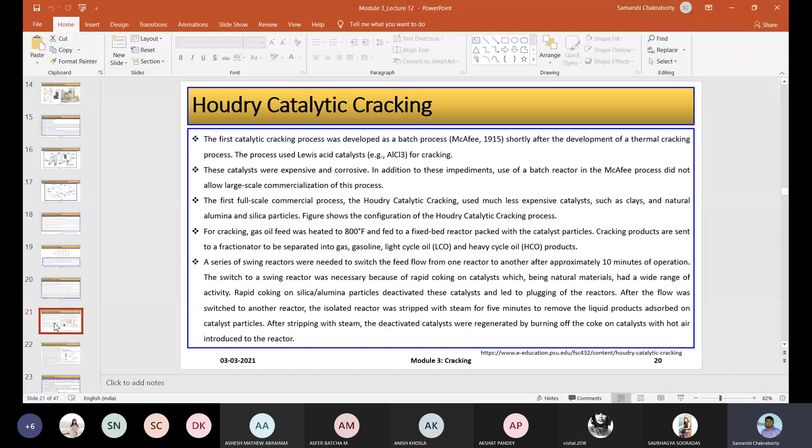So previous day, I guess we had covered up to thermal and catalytic cracking process. Okay, so we'll start today with the thermal cracking process. As the name suggests, cracking is done on the basis of higher temperature. Since we are not using any sort of catalyst, to crack down the heavier petroleum components, the temperature requirement is also significantly on the higher side. So there is a chance of coking, which is why nowadays thermal cracking is not actually preferred in the petroleum industry.

Cracking, by this time you already know, is a petroleum refining process where heavy molecular weight hydrocarbons are broken into smaller hydrocarbons by the application of heat and pressure, with or without catalyst, to derive a variety of fuel products. Cracking is one of the principal ways to convert crude oil into useful products such as motor gasoline, jet fuel, and home heating oil.

The term cracking is used to describe any type of splitting of a molecule under the influence of high temperature, catalyst, and/or in presence of solvent, such as in destructive distillation or pyrolysis, where a higher molecular component is broken down to, here you can see, pentane. Now if it is like C11, what do we call it? Up to C10 we call it decane. So C11, what do we call it? Like pentane, hexane, heptane, octane, nonane, decane, and the C11 component, what do we call it? We have this name, right? I'm not being able to remember the name at this point of time.

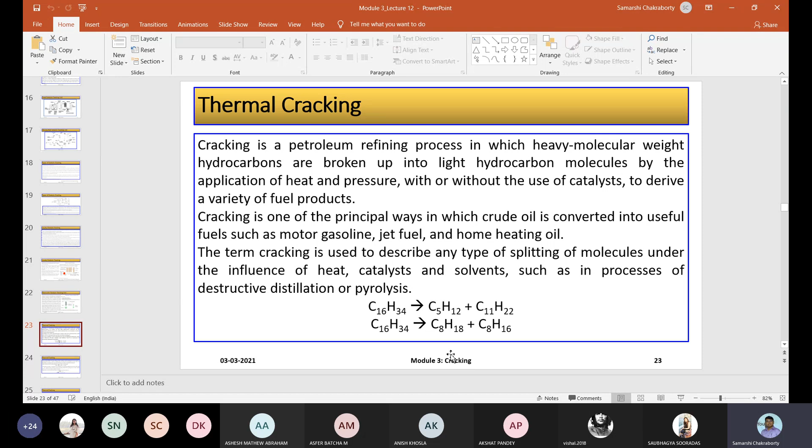The above reaction is most conclusive at moderate temperatures around 400 degrees centigrade, but fragmentation continues with increasing temperature, giving rise to more simple products and occasionally complex products. But if I break my components into octane or octene, this is not going to give any special benefit. So other than breaking it, let's say from C16, if I break it to octane and octene, but if I want to produce more valuable products, I need to lower down my carbon numbers, or to have shorter chain hydrocarbons, we need to increase the temperature even higher. But if I do that, there is a chance of further breakage. So the above reaction is most conclusive at moderate temperature around 400 degrees centigrade, but fragmentation continues with increasing temperature, giving rise to more simple products and occasionally complex compounds.

A paraffin of lesser molecular order cracking can be illustrated as, for example, C12 getting broken down into C6 and C6, and C6 you can further break down into C4 or C3.

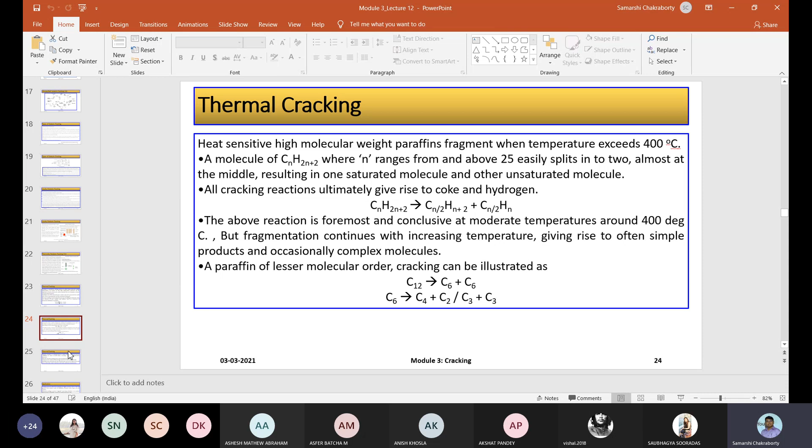By a combination of all these things, you can produce either C4 based products, or C3 plus C2 products, if you heat it up to an appropriate temperature. But for thermal cracking process, since we are not using any type of catalyst, the temperature is a little bit on the higher side.

Thermal cracking in a refinery process heats up your product to 800 degrees centigrade, at a pressure of approximately 700 kPa. Normal atmosphere is 101 kPa, so 700 kPa is a little on the higher side. This is used to break down, rearrange, and combine your hydrocarbon molecules.

Thermal cracking process was first developed in 1913. However, this process produced a lot of solid or unwanted coke.

Distillate fuel and heavy oils were heated under pressure in large drums until they cracked into smaller, more valuable, more useful hydrocarbons with better anti-knock properties. So whenever we do a cracking operation, we are always talking about this knocking tendency.

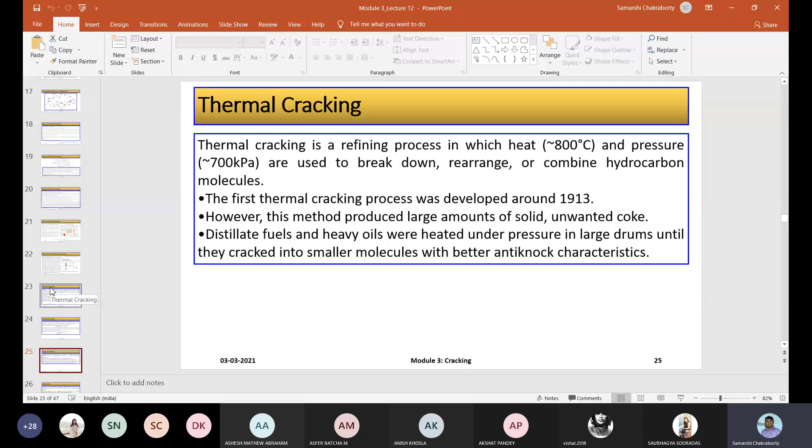Today I don't know whether I'll be able to entirely complete this part. We have to also talk about steam cracking, so in the next class we'll talk about octane number, cetane number, and those properties of gasoline. Cetane number is actually for diesel, and octane number represents how good your gasoline is. Let me just go further.

The cracking process allows the production of lighter products such as LPG, gasoline, from heavier crude oil distillation fractions such as gas oil as well as residues. Thermal cracking is used to upgrade very heavy fractions, or to produce light fraction distillates, burner oils, or petroleum coke. As a product of this, petroleum coke is also produced.

Two extremes of thermal cracking: high temperature process, between 750 to 900 degrees centigrade or even more. Since you are going up to that level, it produces ethylene and other feedstock for the petrochemical industry.

But as I've already told you, in this type of cracking, whether catalytic or thermal, we do not have too much control over exactly what products we are going to produce. We may have an idea that we might produce C2 range or C3 range, but that is not always certain. It is also not certain how much saturated hydrocarbons we are going to produce, and how much unsaturated hydrocarbons we are going to produce, so you cannot be pretty much sure.

So for thermal cracking, catalytic cracking, and steam cracking - these three types - you are not sure whether you are only going to be able to produce saturated hydrocarbon. Obviously unsaturated hydrocarbon production is also possible.

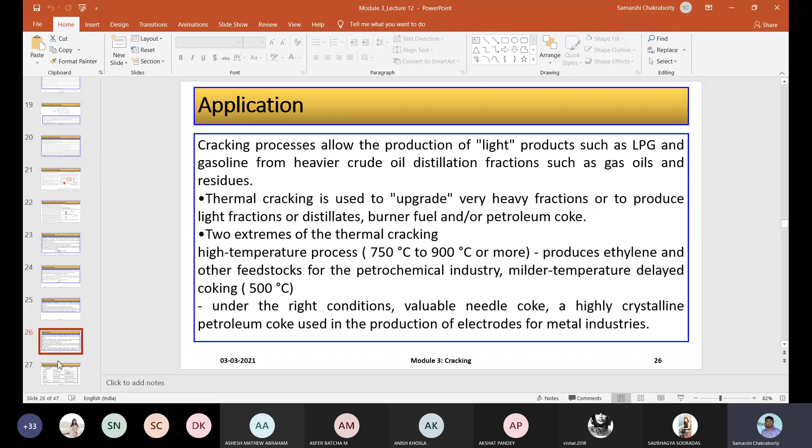So the second stage is, this is one extreme. You see here, by increasing the cracking temperature - these are different types of thermal cracking operations - depending on your cracking temperature, you can produce different types of product: whether hydrogen, gas, gasoline, or unsaturated compounds. That is determined by what cracking temperature you are running your operation at.

At between 425 to 460 degrees centigrade, we are only concerned about lowering down the viscosity of your fuel oil.

You break it down into smaller hydrocarbons so that the viscosity of your fuel oil goes down. Then between 460 to 520 degrees centigrade, you start thermal cracking, where you can produce gas like LPG, gasoline, tar oils, and circulating oils.

Beyond 520 to 600 degrees centigrade, you start to form more and more coke. This is low temperature coking, where you produce gas like LPG, gasoline, plus soft coke.

Beyond 600 to 800 degrees centigrade, you are not going to be able to produce any more gasoline, so gasoline production is out of question. Now you will only be able to produce gaseous products, maybe a little bit of LPG, and mostly unsaturated compounds like ethylene, propylene, and butylene.

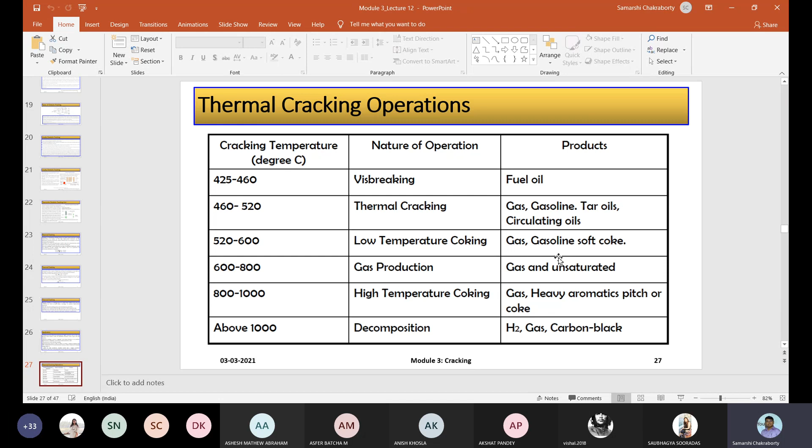This table is very important. It talks about the dependency of your cracking temperature on the nature of operation, plus your cracking temperature also determines what type of products you are going to produce from your cracking unit.

Catalytic cracking yields a higher quantity of branch chain unsaturates and aromatic hydrocarbons compared to thermal cracking. In thermal cracking, you have more chances of coke formation. Catalytic cracking is a better controlled process than thermal cracking. This is true because the reaction time in catalytic cracking is very small, so chances of coke deposition are less. It's a much better controlled operation, so proper circulation of your catalyst, feed, and product goes in a much more systematic way, so its performance is much better.

Then comes petrol production. Petrol obtained by catalytic cracking has lesser sulfur. If you are producing gasoline, petrol is nothing but gasoline, just another name for it. By thermal cracking there is a chance that your feed may contain some amount of sulfurous component, but using catalytic cracking that chance is very less.

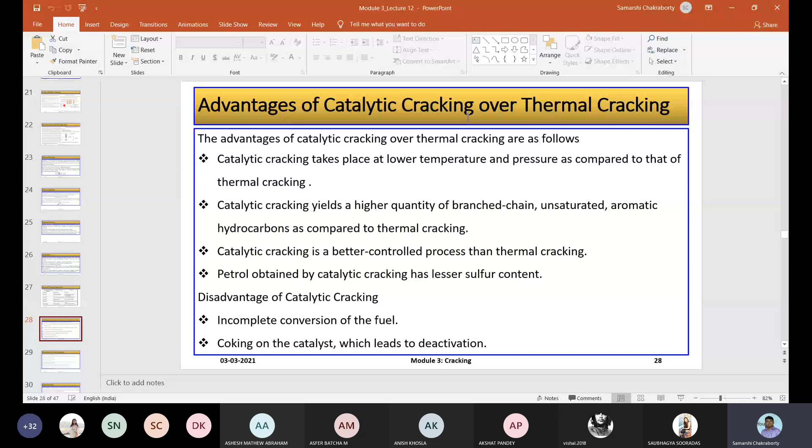One of the disadvantages of catalytic cracking is incomplete conversion of your fuel, and coking on the catalyst leads to deactivation. Since your reaction time is so small, you cannot expect complete conversion of your feedstock because the residence time within the reactor is very small, and from time to time you have to regenerate your catalyst since coke deposition causes catalyst activity to go down. So these are the advantages and disadvantages of catalytic cracking over thermal cracking.

What are the properties of your crack product? Boiling point, pour point, viscosity obviously go down in your crack product. Sulfur in the crack product increases if you are dealing with heavier fractions, although much of it escapes in the form of hydrogen sulfide, because during catalytic cracking you are breaking down heavier petroleum fractions.

During this process there is a chance that you also produce some amount of hydrogen. So hydrogen will actually react with your sulfur and form hydrogen sulfide, and it can escape.

Other than that, the characterization factor, which I talked about in the first module, actually decreases. We talked about how by looking into the characterization factor we can determine whether my crude is aromatic, paraffinic or naphthenic. So in terms of this, your characterization factor actually decreases. For the refinery operation, the octane number increases since obviously you are producing lower molecular weight hydrocarbons.

Additives like tetraethyl lead or tetramethyl lead are extensively used to blend with gasoline to boost its octane number. But the problem is lead poisoning, so now this TEL, tetraethyl lead, or tetramethyl lead are no longer used. Now they have moved on to methyl tertiary butyl ether or ethyl tertiary butyl ether. These are some of the octane boosters that industry generally uses.

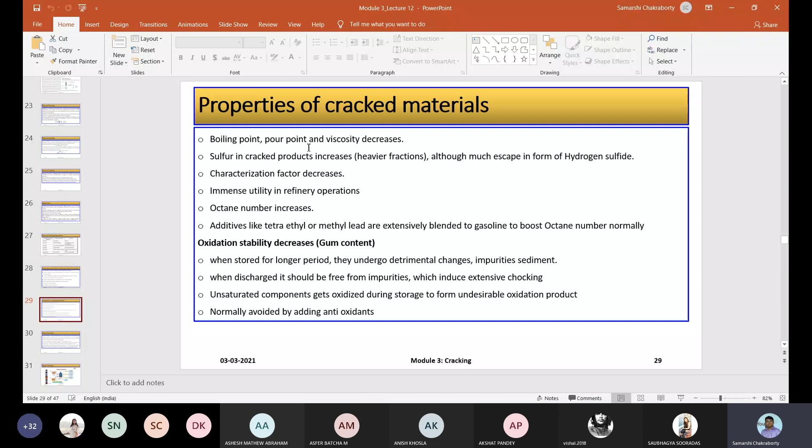Now the second part is very important. This is important not only from your petroleum refinery viewpoint, but also in the context of the petrochemical industry, since this steam cracking process is the process which produces a large amount of unsaturated products, which is the base feedstock for your petrochemical industries like ethylene, propylene, butylene. So steam cracking is a petrochemical process in which saturated hydrocarbons are broken down into smaller, often unsaturated, hydrocarbons.

It is the principal industrial method for producing lighter alkenes. Alkenes are unsaturated, commonly known as olefins, including ethene, ethylene, propylene. It can produce ethylene and propylene, the most important chemical feedstocks, but due to their relatively high reactivity, unsaturated components tend to react with each other, so chances of gum formation are also there. And obviously the chances of polymerization are much easier due to their relatively high reactivity.

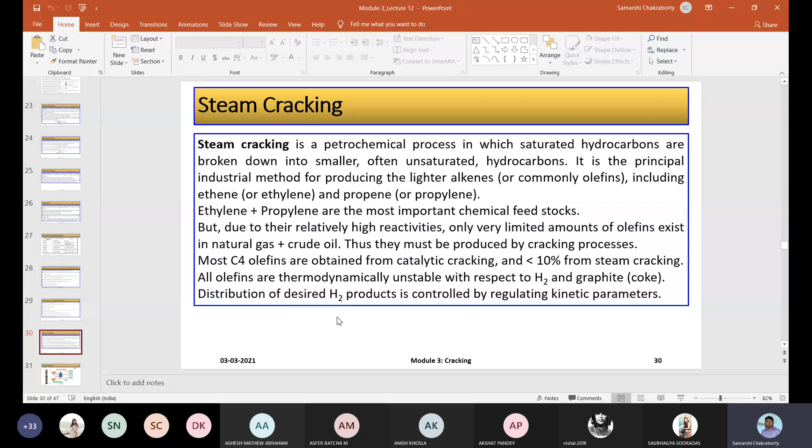Only a very limited amount of olefins exist in natural gases and crude oil. Thus they must be produced by a cracking process like steam cracking. Most C4 olefins are obtained from catalytic cracking, and less than 10% from steam cracking. All olefins are thermodynamically unstable with respect to H2 and with respect to H2 and graphite. The distribution of the desired product is controlled by regulating the kinetic parameters.

For heating this reactor, or to prevent coking inside this tubular furnace - because naphtha and gas oil can deposit coke on the tube surface inside your furnace - we need to be careful. This can choke the entire pipeline, and if not careful, at very high temperature your entire steam cracker can explode. So in order to prevent that, we add steam.

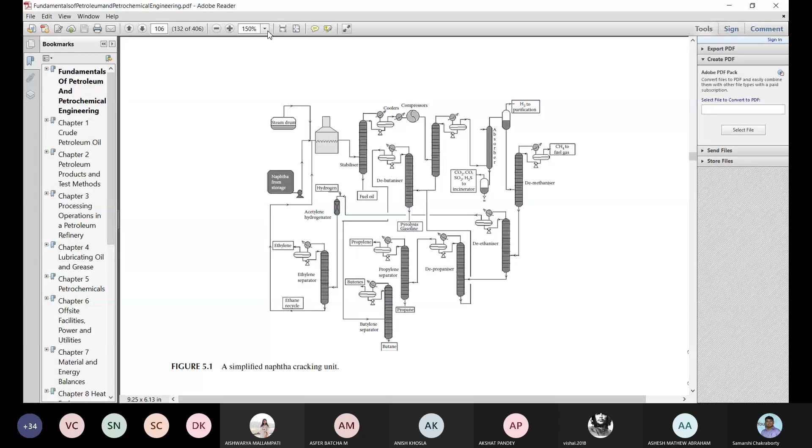So this is the steam cracker I talked about. There they were using a little bit of methane and ethane also; here they are only processing using naphtha, which was produced in our atmospheric distillation unit. As you can see, naphtha produced from the atmospheric distillation unit or by cracking processes can be stored somewhere, then pumped inside this furnace. So this is the steam cracker we are talking about.

Here, steam is coming from the steam drum. You can see this zigzag line - this is nothing but a tubular furnace. Within these tubes, the steam and the naphtha are flowing through. Because we are using steam, that is how we can remove the carbon deposits - if coke deposits on the surface inside this tube, steam should be able to remove it.

Then after the cracking is done - because in that particular figure we directly showed ethylene, butylene, propylene everything separated, but that's not actually the case - this is the integrated system through which propane, butane, ethylene, propylene, and butylene are going to be separated.

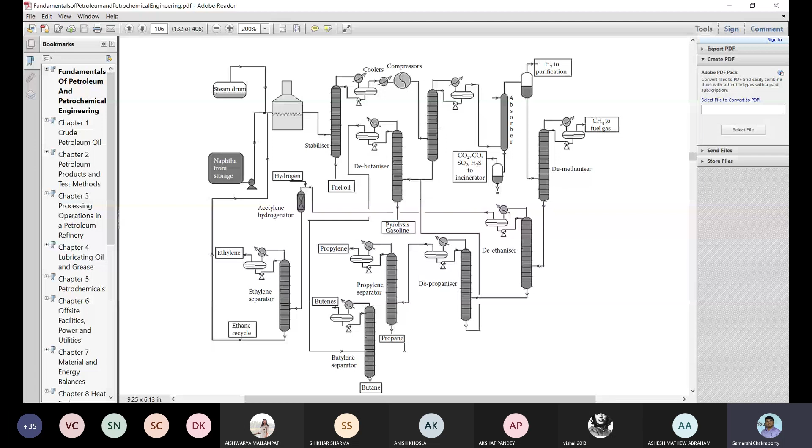Ethane doesn't have a direct application, so you go and use it as feed for your naphtha cracking unit, isn't it? Yes, propane, butane is nothing but LPG, and LPG is expensive - if you sell it you earn a very good amount of money. So from a refinery point of view, they are always thinking about which product, by selling, they will earn more money - lighter products, more money. Ethane, they cannot use it for too many purposes, so they send it again and break it down to ethylene, and from ethylene more valuable products they can produce. Yeah, so that is what it is.

Okay, anything else? I hope you have understood step by step how everything is happening. One may wonder that sir has not talked about aromatic products - aromatic product is also produced, but this aromatic product should be present in the pyrolysis gasoline part. This can further be processed using different types of distillation, and you can separate those things out. So this is my steam cracking unit in detail.

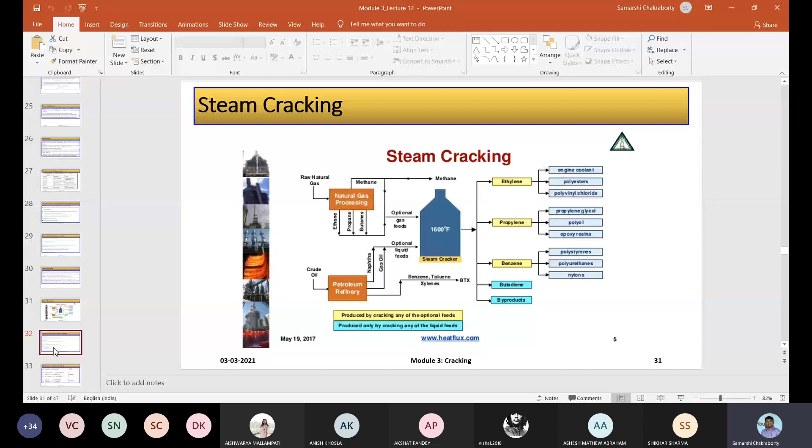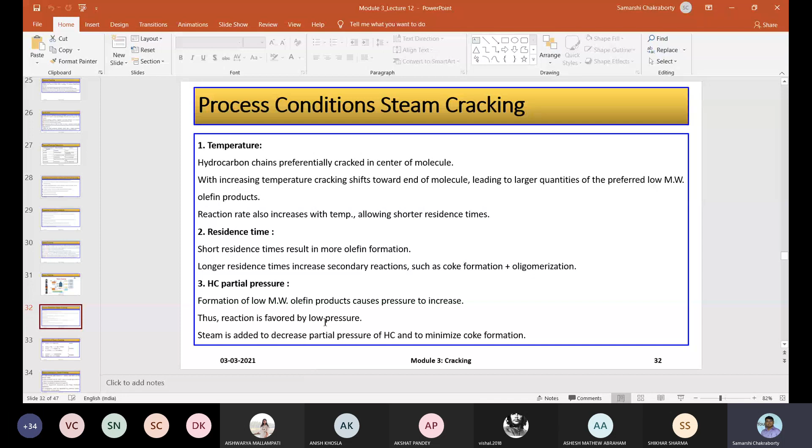Hydrocarbon partial pressure - formation of low molecular weight products causes pressure to increase, thus the reaction is favored at low pressure. Steam is added to decrease the partial pressure of hydrocarbon and to minimize coke formation. For these two purposes you add steam, and the steam cracking process is divided into three stages: initiation, followed by propagation, and then termination reaction.

Now this is ethane only - ethane is breaking down into a CH3 radical, and then further it is reacting with ethane only, forming methane through this reaction. Then it is further breaking down, producing ethylene plus hydrogen plus a hydrogen radical - one hydrogen, one electron is actually free to react with some hydrogen, because carbon has this, so this is like an H plus ion, you can consider it.

No, I cannot call it ion. So what should I call it? I forgot, in terms of chemistry. If this extra electron is available, what do we call it, this H? Free radical, yes, H free radical. Thank you, I forgot because I'm not in touch with chemistry for a long time. There's a general misconception that chemical engineering is all about chemistry, but we hardly study chemistry. We are more focused on mathematics and physics.

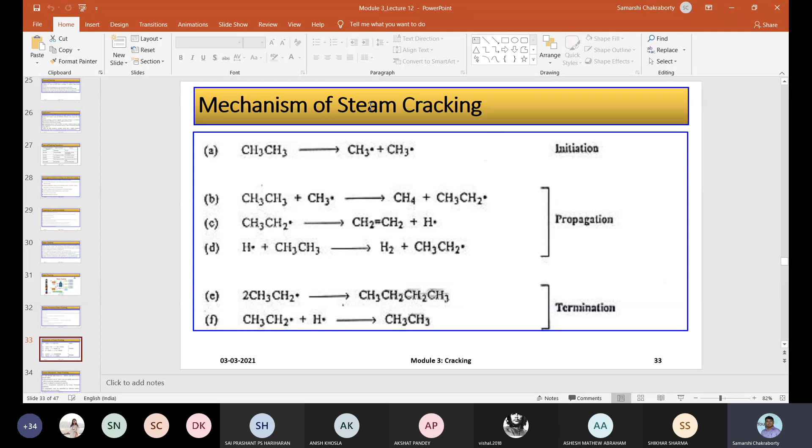So this H plus free radical reacts with ethane, it forms H2 plus this other free radical, which can further react and produce this, which is nothing but butane only - CH3, CH2, CH2, CH3. So that is butane, and after reacting, ethane is also produced. So there are three stages: initiation, propagation, and termination. That is how the mechanism of your steam cracking unit actually works.

Okay, process description - I have already explained this, so let me just read through it. Hydrocarbon feed is heated with steam to 1050 degrees centigrade, fed to chromium nickel reactor tubes. Cracked products exit at 850 degrees centigrade. Can anybody tell me, hydrocarbon is heated to 1050 degrees and fed to this reactor tube, but the cracked product exits at 850 degrees centigrade - do I get any information out of this reaction and temperature?

Product is exiting, I have not done any heat exchange here. Why is product exiting at a lower temperature? Cracking reaction is a... what kind of reaction is it? Endothermic - endothermic reaction, exactly, that's the answer. So cracked product temperature is obviously lower, because cracking is an endothermic reaction, so it lowers down the product temperature.

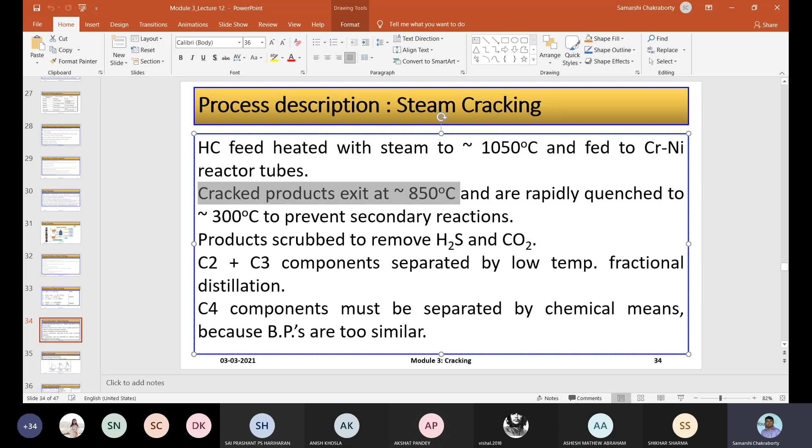I would suggest you check the book I referred to today, Uttam Ray Chaudhuri's book on Fundamentals of Petroleum and Petrochemical Engineering. I'll share that book with you so you can have a look into this steam cracking unit operation.

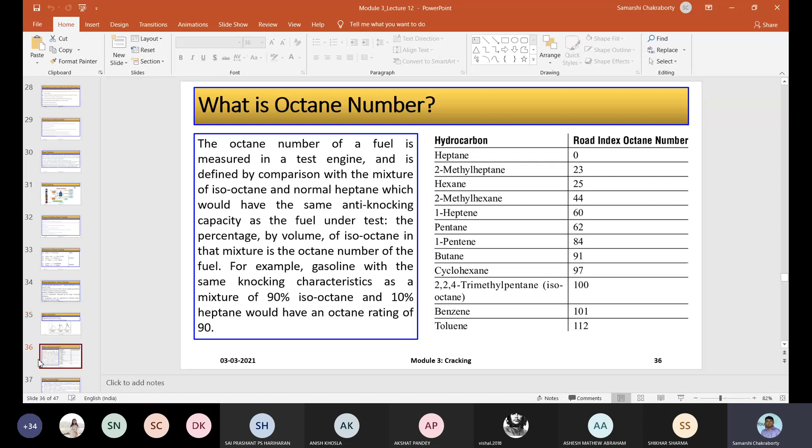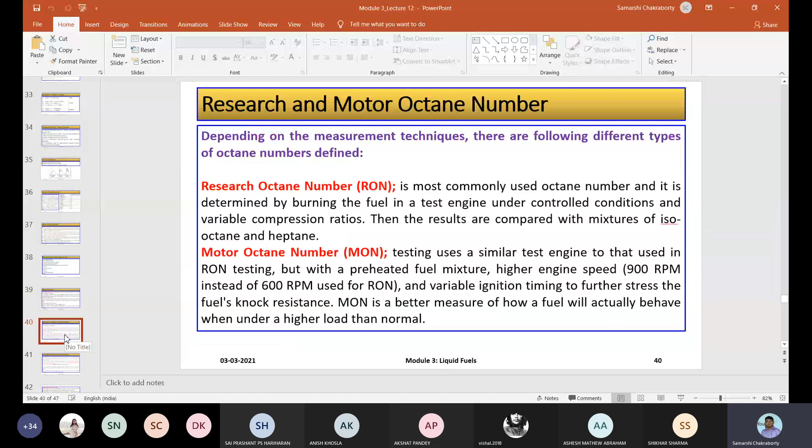This is okay, so I have already crossed my time. In the next class onwards, I'll talk about knocking, then octane number, because we always talk about anti-knocking but never explain octane number. So octane number we'll discuss a bit more - there are different types: research octane number, motor octane number. We will discuss that subsequently.

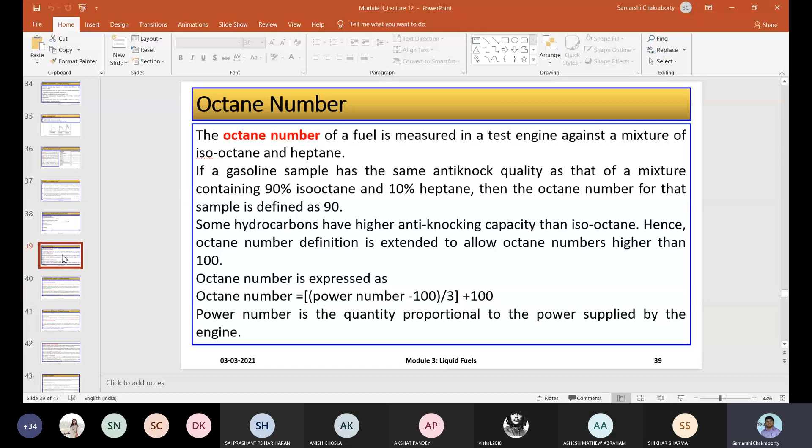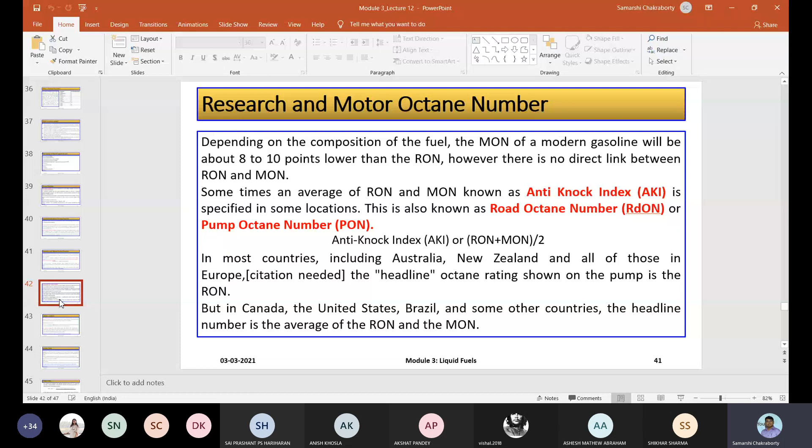One thing I missed out is hydrocracking, because I have talked about thermal cracking, catalytic, fluidized catalytic cracking, both moving and fixed bed, and steam cracking, but not hydrocracking. So I'll talk a little bit about hydrocracking, and then move on to knocking, gasoline, octane number, motor octane number, research octane number - those things we will discuss in the next class. Let me remember not to start with knocking first - I'll talk about hydrocracking first, then knocking and octane number types later.